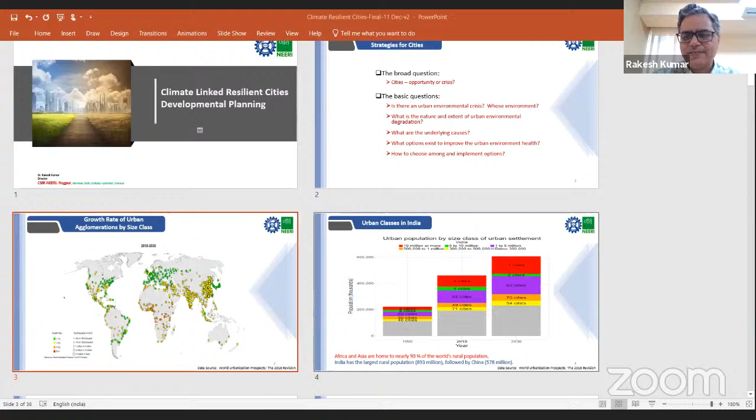This is a multi-view view. Yes, okay, yes, this is the topic: Climate-linked resilient cities developmental planning.

Thank you, Swamiji, and my good old friend, senior and friend both, Biswas ji, and all the colleagues and everyone else who has joined. Thank you very much for two things. One is the belief that I'll be able to give you a good lecture. And the second thing is for getting me into this conversation, which is very, very important for our country, which we should be discussing not only today but all the time. And that is what will take us far.

Many of you who do not know, NEERI is based out of Nagpur, that's where the head office is. But it's also there in Mumbai, Delhi, Kolkata, Hyderabad, and Chennai. Earlier we had 4 other regional centers, but that got assimilated over a period of time.

NEERI is an organization which got started in 1958 because of water and water-related issues. There was an outbreak of jaundice, and because of that, people felt we should have a research institution on water and sanitation. That is the reason why we are here. NEERI is also an institution where you have people from different disciplines, starting from all sciences to all engineering, on one single platform. We take pride in solving problems rather than only pointing out problems.

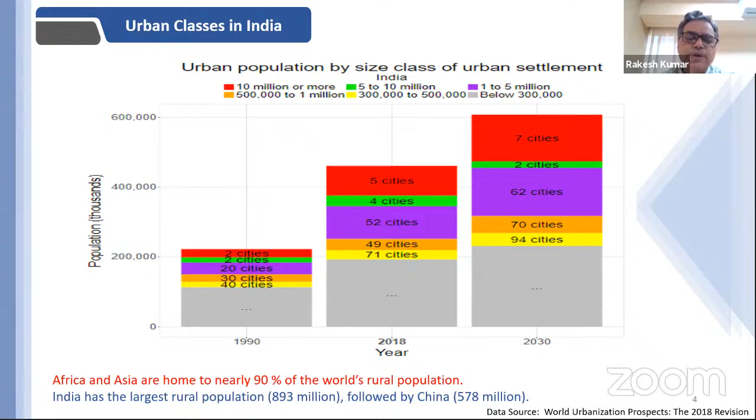So our rate of growth has been of high significance if you look at urban population and rural population together.

When we look at urban environment, we have variable pressure attributes. One, of course, is population, poverty, economic activity. Whenever we act, we have waste and emissions, air pollution, water pollution, resource use and degradation, and climate change-linked disasters - sudden flood situations, sudden drought situations, or cyclonic issues - all of that are basically pressure attributes. And of course, in recent times, NGOs, NPOs, and the judiciary are also putting a lot of pressure.

The other factors relate to how we succeed, and how we succeed in a particular way. We may fail if we don't do it the right way. So if our awareness is good, chances are we'll take action and improve. If our regulation and pricing policies are right, chances of success are high. Property rights and land use definition, if given, then success is high.

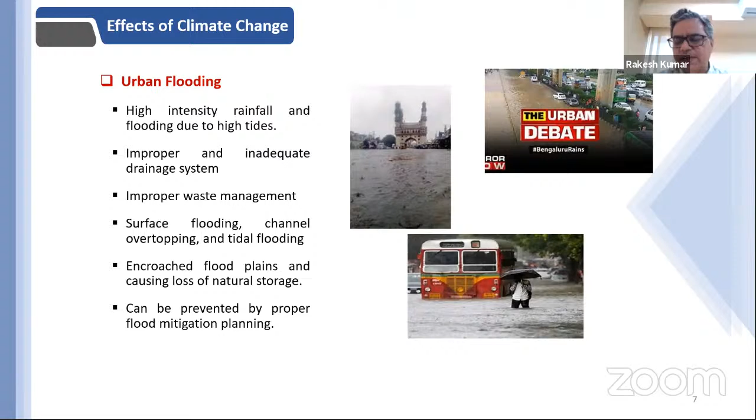So what happens when these situations arise? We have failure of infrastructure, like transport systems breaking down. Buildings can actually be in deep trouble if they're not built the right way. All utilities such as power and water supply get damaged. Hospitals, schools, and offices, which give support during crisis, are the ones that start having problems because of these issues.

And the last one, which is the most critical, is the supply chain mechanism. If I want to send medicine, food, or clothing, I can't actually do that because the crisis is serious and our supply chain is completely broken. Roadways and other infrastructure that are supposed to be supplying get broken.

Besides the impact on human beings, we also have ecosystem damages. This will completely change the way species live and interact. It will change the timing of biological events, and some of these things we will not notice in a short period of time. Later on, we'll realize that these timings are changing, which creates a lot of problems.

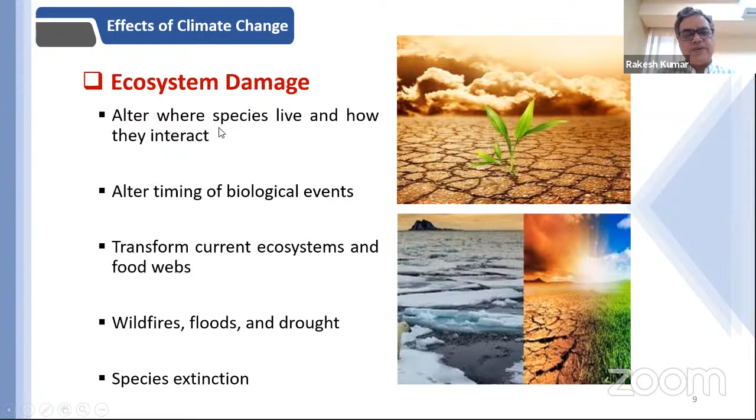Just to give an example, earlier the malaria window in certain Himalayan states used to be hardly about a month, but that has now expanded to about 2 to 2.5 to 3 months. So something is happening. It changes and transforms ecosystems and food webs. And when all of this happens, it will lead to wildfires, floods, and drought, and of course species extinction will take place.

In addition, when we look at the effect of climate change on air and water quality, which is directly linked with what we do, it will lead to human health impacts. It will lead to an increase in allergens in the air, which will start giving us health issues, and an increase in ozone. Whenever that kind of thing happens, we will have very intense downpours.

And depending on the situation in certain areas, we will have droughts. When water temperatures rise, you will have high evaporation and won't have enough water to drink. And obviously, when all of this happens, we will also have waterborne illnesses.

All of these things together will increase diseases, so the occurrence of infectious diseases will keep increasing. If I look at this health impact, all of these can happen: global warming, extreme weather phenomena, darker winters, slippery conditions, increasing precipitation, and hot weather will lead to all kinds of things, including water-related diseases.

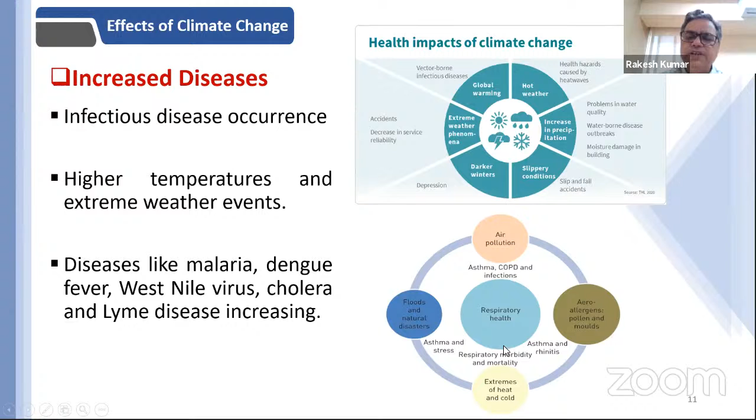We will have darker winters, meaning depression-related issues. We will have extreme weather phenomena leading to accidents, decrease in services, and vector-borne diseases. So we will have a large set of data coming out with all kinds of symptoms, and air pollution alone will lead to major respiratory symptoms and create issues for all of us.

In addition to that, microclimate changes take place. One is macro, when we talk about the whole of India, or even part of the region, like the coastal region of India, or say Rajasthan, the arid regions of India, or the Himalayan regions of India.

So cities are bigger in terms of sizes. But what also happens is in the small areas, we will have a significant increase or decrease in temperature, which will actually start affecting our comfort factor for staying in cities, which will be a problem.

One study which IIT Gandhinagar did found that 80% of urban areas show a typical urban heat island effect, where the temperature is 1 to 6 degrees warmer than the surrounding non-urban areas. Normally when we talk about climate change, we are talking about an average temperature rise of 1 to 1.5 degrees. But here, if our urban climate is not properly maintained or designed the right way, the temperature rise can be 1 to 6 degrees.

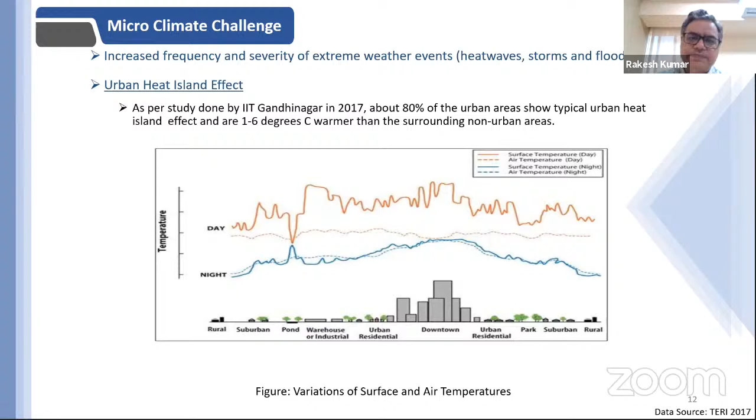Some of the other work that we have done shows these temperatures can go as high as even 10 degrees centigrade. So when we look at urban microclimate, when you have trees around, some heat gets absorbed and retained, some plant transpiration takes place, and when water falls, it goes below into the ground.

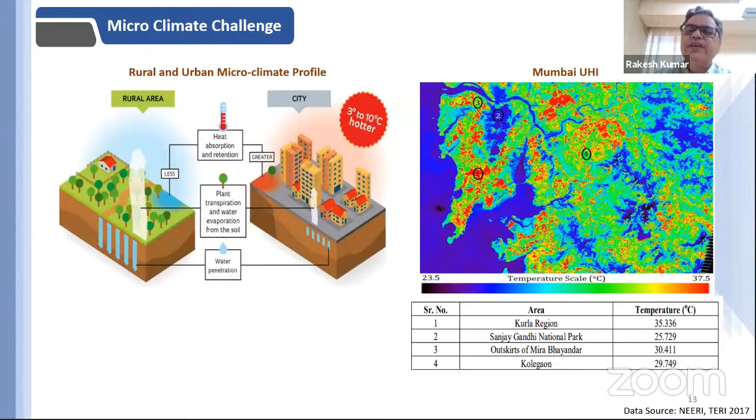We don't have to go too far, we don't have to cross countries, we can actually see it in this area. So when we do all of that, we will have high mortality. It could be due to heat, it could be flooding, it could be vector-borne diseases, or anything.

And these are the numbers now which have started coming in. The data is telling us that we would have very high deaths annually on this basis. As we go forward, there are some estimates being done for 2030 to 2050 which show it will lead to 250,000 additional deaths per year, and that's very significant.

These are of course computer models, but it is important to notice that all these models being talked about are now being validated for current times. So something which was predicted for 1970 is now happening in the years 2000, 2010, and 2020. Some of these data points are becoming more and more valid and apparent.

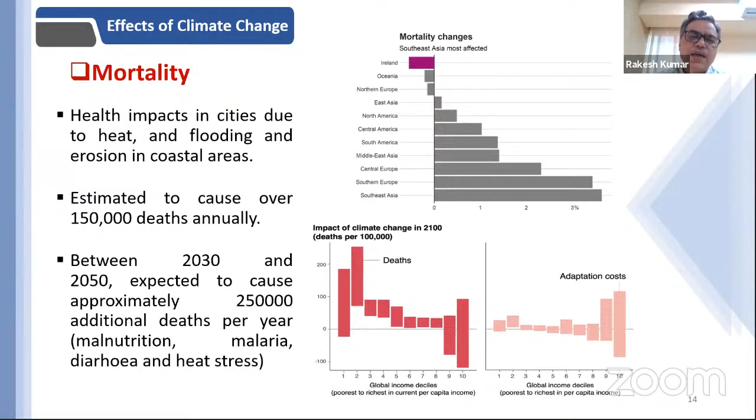So what is the limit when we want to do certain things on our own as an individual or as a community? When we look at these two concepts, assimilative and supportive capacity, assimilative capacity means that as human beings, when we create air pollution, water pollution, or solid waste and soil related issues, nature has its own tendency of assimilating it and making it proper.

Supportive capacity is the resources that we take from nature. When these two are matching, or in a balanced condition, things remain stable, but that balance starts changing because of climate change and related high pollutant discharges, which are exceeding the environmental limits.

So dilute and disperse can work in certain cases, yes, but if your assimilative capacity gets into serious trouble, you would have a situation where whatever we may do, our rivers would continue to be polluted, even if we are treating to tertiary level. If our BOD is in the range of 10, my river will be flowing with BOD of 10, which is not what we want. Our BOD limits should be less than 3, and that's not going to happen in the normal way.

So should we plan, and how do we do it? In a broader sense, if you take a territorial perspective, not just cities, because cities are a very small domain of things, but cities and the areas in and around them can be taken as territorial areas, and then this planned city or city area can be developed like a sustainable development paradigm, and plans made accordingly.

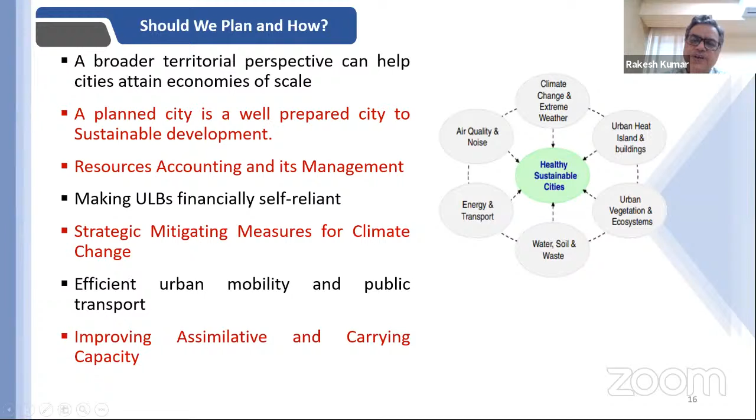I'll have to manage climate change and extreme weather, urban heat island, urban vegetation, water and soil, energy and transport. So all of these things together, when they start working in a positive way, chances are the city will survive. So what is it that we call a resilient city?

As I said in the beginning, resilient actually refers to the ability of any urban system to withstand and recover quickly from multiple shocks and stresses, and maintain continuity of services. That is one definition. There could be multiple definitions depending upon what we want to see out of this.

As we can see here, United Nations Habitat has made this framework where we start by identifying vulnerabilities, risk and impact, formulate adaptation options, assess and prioritize those options, implement measures, monitor and evaluate their effectiveness, and finally review them again, going on in circles.

So it's very important that when we talk about climate resilient services, for each parameter we must do a risk assessment, create awareness, do adaptation, look at resource efficiency, and then keep doing this adaptation planning and going back. Because if we don't monitor our progress, we are likely to fail, and that failure will be known only after 10 years, 15 years.

So in this case, we can't be doing that. We need to keep reviewing our goal post every year, and then readjusting our goals.

So key challenges, if I have to say, for urban areas: traffic jams and vehicular pollution, poor urban infrastructure, heat island effect, waste handling, housing which is very critical, healthcare facilities, air pollution, and heat waves in summer.

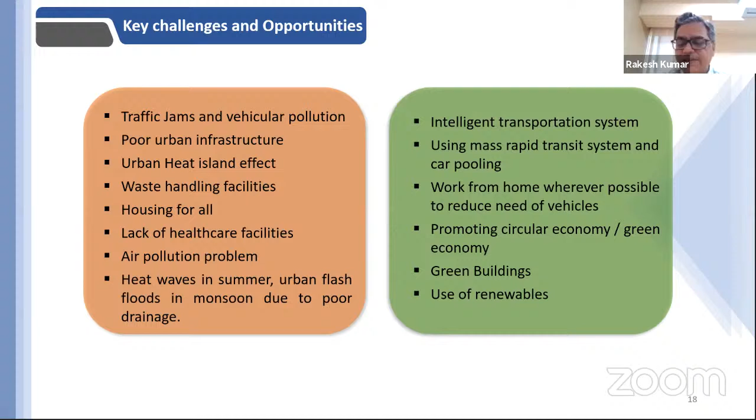It is very important to note here that India has the largest number of green buildings in the world as of now, and that's only because our environmental laws and policies have forced many builders and so-called good developers to work out details in which green buildings have been constructed.

And I'm glad there are some lectures after mine where we are talking about good tailored sewage conveyance and treatment systems, retrofitting existing sewerage infrastructure as per current requirement.

Most of our cities are in a decaying stage. The infrastructure of sewerage and sewer planning is in poor state, so they need to be refurbished.

And look at reduce, reuse, recycle, which we all know in terms of waste, and use IoT for smart controls, because unless we do that for a population like ours, we will not be able to do a good job.

So when we look at climate resilient strategy in some other countries, although the US has not signed the Paris Treaty, if you go around and find out, many cities in the United States have started talking about climate change and the idea of improving resilience of cities, and that's happening across many places. One city like Pittsburgh has already made this, they call it Pittsburgh Resilience Strategy, in which they put forward this idea called P4.

So people, planet, place, and performance. People meaning all those people who are going to live in the city. They need to be connected. They need to celebrate diversity. They need to be supportive to each other. And for that there is a structure.

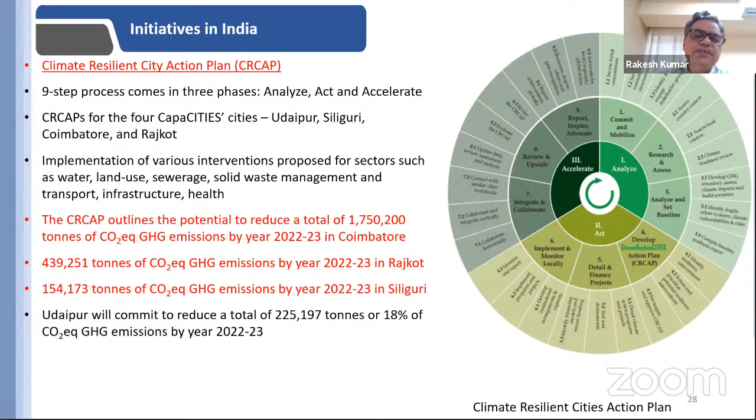Similarly, other work being done includes a program called Asian Cities Climate Change Resilience Network. It is working in four other cities: Surat, Pune, Cochin, and Ludhiana. In each of these, resource-related issues are being discussed, along with economic robustness, economic development, climate change adaptation, and the role of local and diverse processes linked finally to health.

But what is actually happening is that many of you in the climate modeling domain will find that when we do this calculation, there's very wide variation in the results of climate models. So what is important is that we need to bring these climate models and scale them down to a level that everyone can use for their own areas and regions, making it much easier for people to understand and take necessary action.

So what are the ways cities can build more climate resilient neighborhoods? I'm just giving some examples. One is to tailor early warning systems to meet the needs of vulnerable people. For instance, you can announce if a cyclone is coming, or flooding is likely, or infrastructure-related damage can happen—in that case, early warning systems will be helpful.

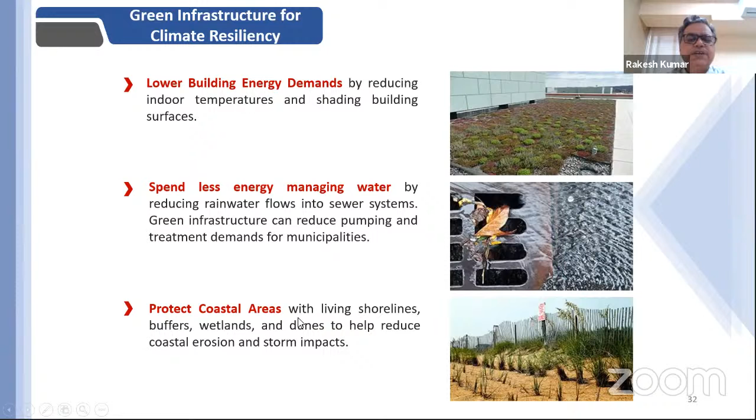So when I talk about climate resilience, there are a few things: manage flooding, prepare for drought, reduce urban heat island—for which there are various means. Lower building energy demands by making green buildings or traditional buildings so energy demand is lower. Spend less energy managing water by capturing rainwater or recycling wastewater so demand on water is less. And of course, protect coastal areas with buffers, wetlands, and dunes.

There are some modeling tools and techniques used, so I will not go into detail, but what's important is that while planning resilient infrastructure for cities, there are good models now available, and new models can also be developed—starting from ENVI-met, RayMan Pro, Minfoam, CFD, WRF Chem or WRF itself, remote sensing, etc. We have to start using some of these modern tools and techniques.

We also need to start doing future planning and design of infrastructure, looking at what changes will take place in the next 25, 30 years. As I said a couple of slides back, all global climate models need to be downscaled to know what is going to happen in the local area. Otherwise, globally, the data is not sufficient to take decisions. Socioeconomic scenarios and their representation, as I said earlier, are also very important.

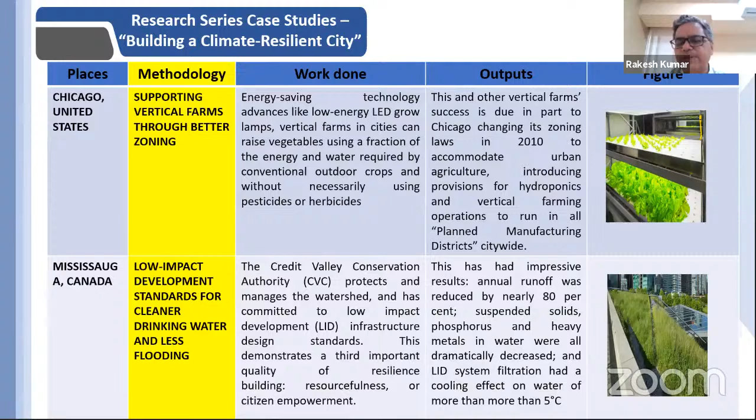So these are some examples. For example, in Chicago, United States, they are supporting vertical farms through better zoning. These are details, but urban farming can possibly become reality. In Mississauga, Canada, they are implementing low impact development standards for cleaner drinking water and less flooding—creating infrastructure so that when rains happen, water gets soaked and kept in a single place and goes down. Gibsons, Canada is taking advantage of the lower cost and higher resilience of natural systems, preserving the natural system so it can last forever.

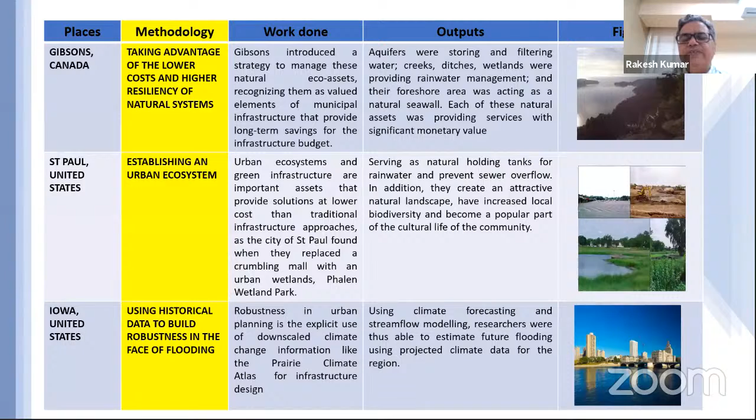St. Paul is another city, in Minnesota—it's called a Twin City. They are establishing a new urban ecosystem where urban areas are being converted largely into natural ecosystems so that biodiversity is also maintained. Iowa is another city working on historical data to build robustness against flooding. All of these are being done by way of retrofitting existing cities.

So the key conclusion from my talk is that there is an urgent need for climate resilience in the built environment planning and development of society.

Various approaches have been used, but we should not only be talking about circular economy, but approaches like carrying capacity, green infrastructure development, smart city development, which India has been doing to a greater extent, but it can do more. There's an urgent need to develop an early warning system, as I said, that's the most important aspect, so that people know what is going to happen and how, and can take necessary action.

Model tools and techniques, as I said, CFD and WRF can be used to mitigate impacts. And knowledge is what actually can tell us a lot of things from ancient architecture as well. Our people in different parts of the country had different kinds of architecture because they understood what was going on. But what we see now is all structures are being built in a similar way, so we need to relook at this whole system of structures that we are making. And lastly, nature-based and nature-derived tools and techniques should be used, which will actually do the mitigation much better otherwise.

So thank you very much, and thank you for having me for this lecture. Thank you.

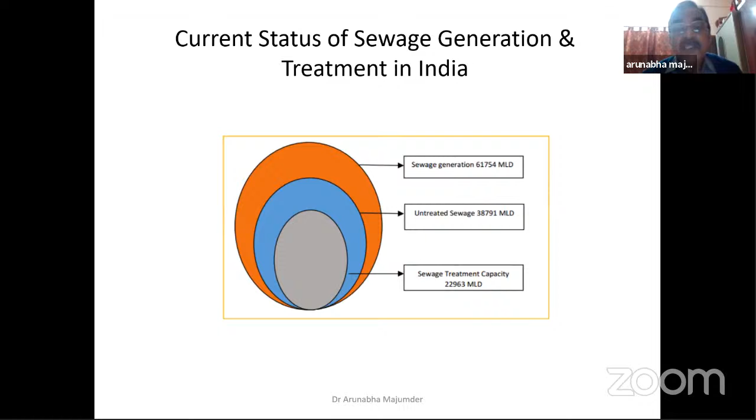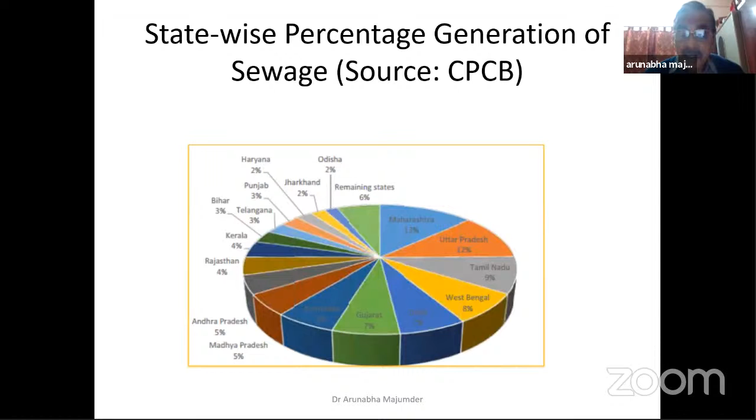If we look into the state-wise percentage generation of sewage according to the Central Pollution Control Board, you will find the generation of sewage varies, maybe from 12-13% to even 1%, depending upon the size of the states. But if we project this generation state-wise, you will find that 49% of the country's sewage is generated from the top 5 states, like Maharashtra.

Maharashtra generates 8,143 million liters per day, that is 13% of the sewage. Uttar Pradesh generates 7,124 million liters per day, that is 12%. Tamil Nadu generates 5,599 million liters per day, that is 9%. West Bengal generates 4,667 million liters per day, that is 8%. And Gujarat generates 4,119 million liters per day. So these 5 states together produce 49% of the country's sewage.

Installed capacity sewage treatment plants in the top 5 states account for 66% of the country's treatment capacity. Maharashtra treats 22.16%, that is 5,160 MLD of sewage. Gujarat treats 13.16%, roughly 13% of total India's sewage. Delhi treats 11.58%, that is 2,694 million liters per day. Uttar Pradesh treats 11.37%, that is 2,646 million liter per day. Tamil Nadu treats 1,800 million liter, that is 7.63%.

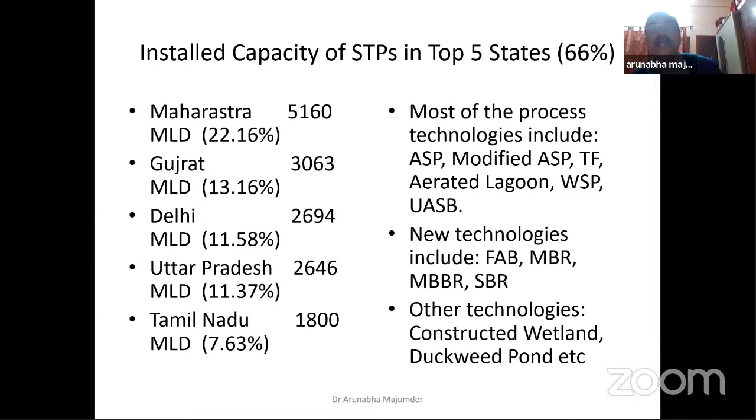Now, in the wastewater treatment system you will find centralized treatment system and decentralized treatment system. In the past, mostly we adhered to the centralized treatment system. Our experience with respect to centralized treatment system is that it is costly because pipeline costs more, pumping costs more, operation and maintenance costs more, and also there are various problems in running these waste treatment plants.

Many centralized waste treatment plants are not running. In this connection, I like to mention the sewage treatment plants that were installed during Ganga Action Plan Phase 1, remaining idle today. These are mostly in a defunct stage, not functioning, and today the Government of India under the Namami Gange program is giving fund again for renovation and reconstruction of the sewage treatment plants. I can even give the example of Howrah sewage treatment plant. This is not functioning today, and it needs to be dismantled, and a new sewage treatment plant will be built shortly. Like that, Srirampur sewage treatment plant, many sewage treatment plants became non-functional. Even Noapara sewage treatment plant, that is Baranagar, and Kamarhati sewage treatment plant, are also not functioning.

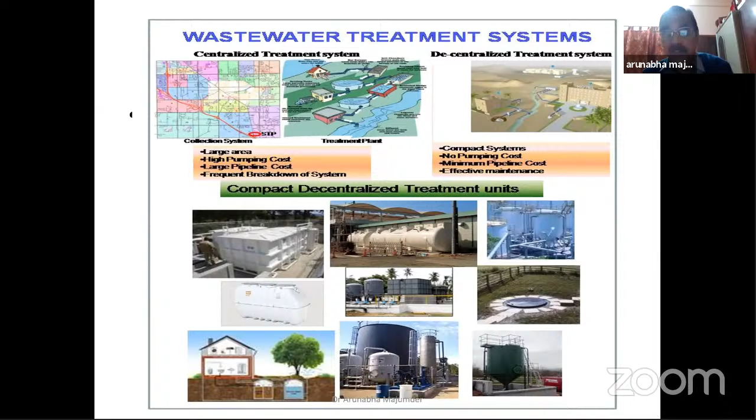We do consider, and you have options with respect to different treatment systems for the same city. This is the sewage treatment plant where you will find that we have a pre-treatment system, primary treatment, then secondary, and then tertiary. Normally we do the pre-treatment, primary treatment, and secondary treatment.

According to the old standard, our BOD limit should not be more than 30 milligram per liter. It was the standard as per the Ministry of Environment and Forest, Government of India. CPCB was also following this. We, the local urban bodies, were also adhering to that standard: 30 milligram per liter BOD, 250 milligram per liter COD, 100 milligram per liter suspended solids, like that.

Now the situation has changed, because of very many reasons of Ganga pollution, Jamuna river pollution, etc. We found that for Jamuna river pollution control, the limit of treated sewage came down to 20 milligram per liter BOD. Now, recently, in 2019, the Honorable National Green Tribunal has modified the standard.

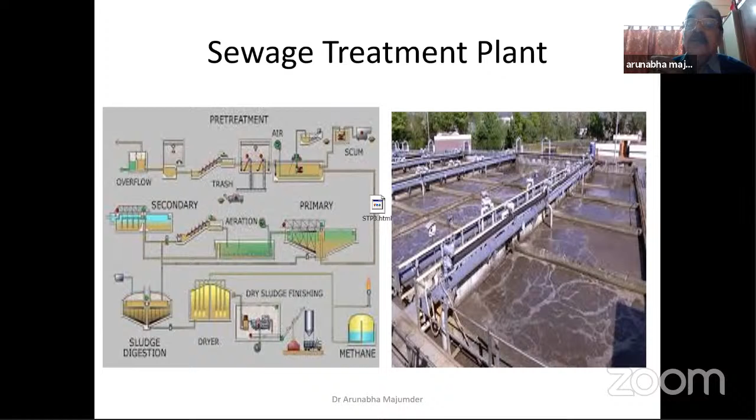Mostly we find this not only in urban sewage treatment plants like city or municipal sewage treatment plants, but also similarly in industrial wastewater treatment systems. Also, the operators who are operating these plants are not properly trained. This is also an important issue that we find while visiting sewage treatment plants and effluent treatment plants.

The water may flow downflow, upflow, both down and up flow, or horizontal flow. So when it is flowing through this media horizontally, or in an up-down vertical system, or only downward, the treatment is taking place. There is an attached growth system in the media, which becomes an aerobic system — an advantage. We can also grow plants over it, which supplies oxygen to the system.

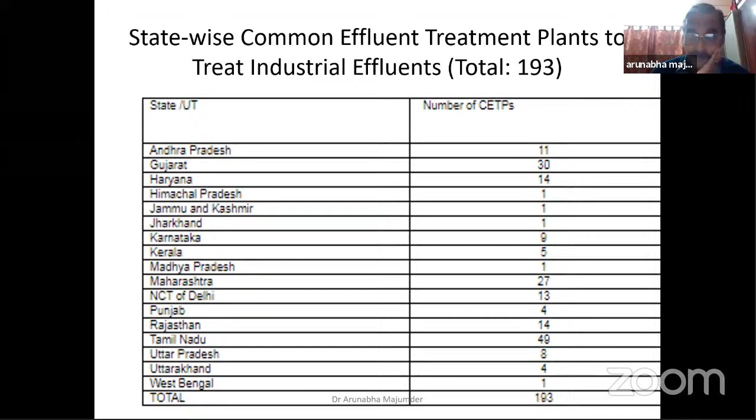Today, according to information available to me, 193 common effluent treatment plants are working, give or take two, three, or four more. The maximum number of common effluent treatment plants are working in Tamil Nadu, 49, Maharashtra, 27, and Gujarat, 30. Whereas in West Bengal, we have only one common effluent treatment plant, at Koraidanga, for treatment of tannery effluent. Now we come back to the sewage treatment plant.

The number of sewage treatment plants, according to information available to me, is 920 in India. So 920 municipal sewage treatment plants are working in India, and accordingly you will find different states have different numbers. In West Bengal, we have 28 functional sewage treatment plants.

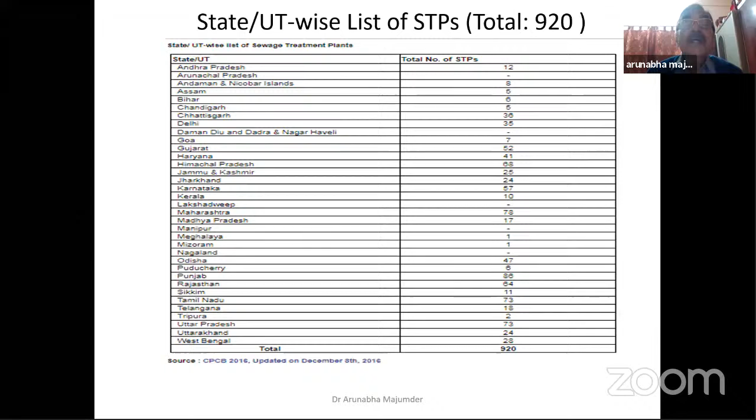Now, if we look into the mega cities, metro cities, class 1 cities, and class 2 cities, we are generating 40,000 million liters of sewage. Earlier, in the first slide, I showed the total wastewater, covering class 1, class 2, class 3, mega city, metro city, like that. Actually, we have more than 7,000 cities in India.

Of the 40,000 million liters of sewage generated in mega, metro, class 1 and class 2 cities, only 30% of the wastewater is getting treated as per facility available. But the treated effluent from 39% of sewage treatment plants is not conforming to the standard. This is important to be noted: 39% of sewage treatment plants are not functioning properly, and their effluents are not conforming to the standard.

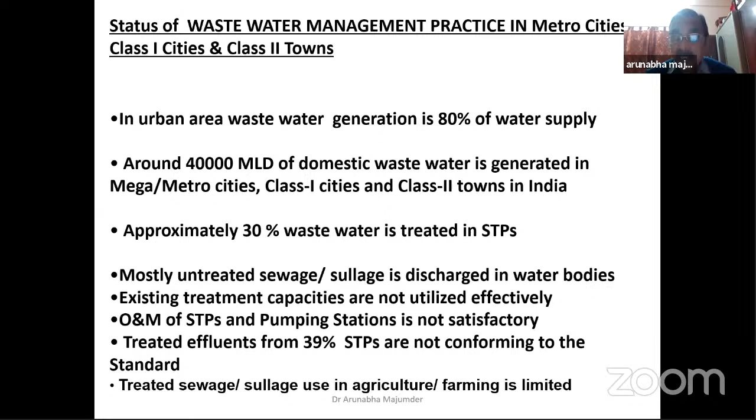Operation and maintenance of sewage treatment plants and pumping stations are unsatisfactory. Existing treatment capacities are not utilized effectively in many treatment systems, and these are mostly discharged into water bodies. Some wastewater is getting discharged to agricultural or farming land.

So the mode of disposal of urban wastewater includes direct disposal into the river. In some cities and towns, disposal is directly into the river as well as into agricultural land. There is also indirect disposal into rivers, lakes and ponds, and direct disposal into agricultural lands. In coastal cities and towns, wastewater finds its way to estuaries, creeks and bays.

In summary, I can say that the major quantum of treated wastewater is getting discharged into water bodies, rivers and canals. Only a certain portion of this wastewater is utilized for agricultural purposes, and that is still limited today. So we have ample opportunity for recycling and reusing wastewater.

Regarding disposal of urban wastewater, a study conducted by 7 IITs led by Professor Vinod Tare under the National River Conservation Directorate made recommendations. They recommended that treated sewage should not be discharged into the river. Strictly, they mentioned that not a single drop of sewage after treatment should be discharged into the river. Instead, they recommended the use of treated sewage for different purposes, such as agriculture and industry. So therefore, we have to look into this particular issue of recycling and reuse of wastewater.

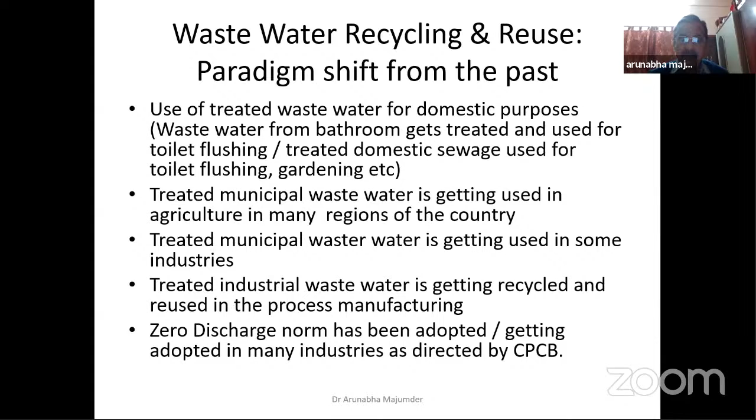Relevant issues to be addressed for wastewater recycling and reuse: selecting appropriate technology for developing tailor-made wastewater treatment processes to meet the quality standard for recycling and reuse of wastewater. This is very important - what technology you will adopt. So selection of technology is an important issue we consider.

To assess the scope as well as extent and magnitude of the demand for recycling and reuse of wastewater. This is very important - that means assessment of the demand of water.

Operation and maintenance aspect of the total process mechanism is important because there could be risk. When we talk about recycling and reuse of wastewater, say sewage after treatment is utilized for agriculture, there could be occupational health hazard for the farmers and consumer health hazard. If I am consuming vegetable salad without cleaning or washing with hot water, it may cause problems - it may cause helminthic infestation in the body. So therefore various risk aspects also need to be looked into.

Cost benefit analysis and social as well as user acceptability in the system is also very important. User acceptability - and accordingly we have to motivate the people. When talking about utilization of wastewater in agriculture, the farmers need to be motivated and made aware.

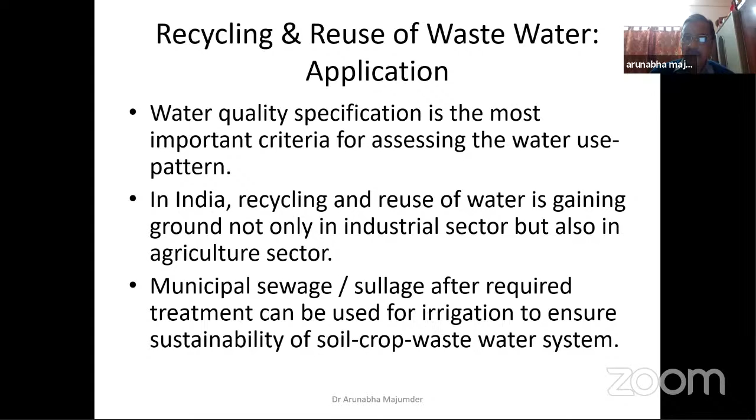In India, recycling and reuse of water is gaining ground not only in industrial sector but also in agricultural sector. Municipal sewage after required treatment can be used for irrigation to ensure sustainability of the soil-crop-wastewater system. In developed countries where environmental standards are applied very strictly, like USA or European countries, much of the wastewater is treated prior to use for irrigation of fodder, fiber, and seed crops, and to a limited extent for irrigation of orchards, vineyards, and other crops. So the extent of treatment necessary depends upon its use.

In India, use of urban wastewater for irrigation is in practice in some specific areas. It includes application of untreated or partially treated wastewater in crops and vegetable production. If I talk about East Kolkata, we are utilizing untreated wastewater - in East Kolkata wetland, vegetables are grown with untreated wastewater, yes. So there are instances in India where untreated or partially treated wastewater gets utilized.

In India, treated sewage is being used today for a variety of applications. What purpose are we now using treated wastewater for in India? For farm forestry, horticulture, industrial use such as cooling towers, agriculture, fish culture, toilet flushing, etc.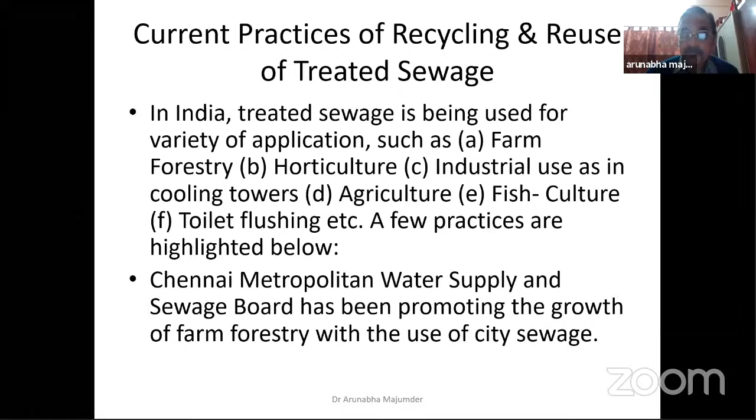I'm giving some examples from our country of utilization of wastewater. Chennai Municipal Metropolitan Water Supply and Sewerage Board has been promoting the growth of farm forestry with the use of city sewage. This is the utilization of wastewater - sprinkler methods being adhered to here. They are following that with the wastewater, utilized in the lawn, golf course, etc.

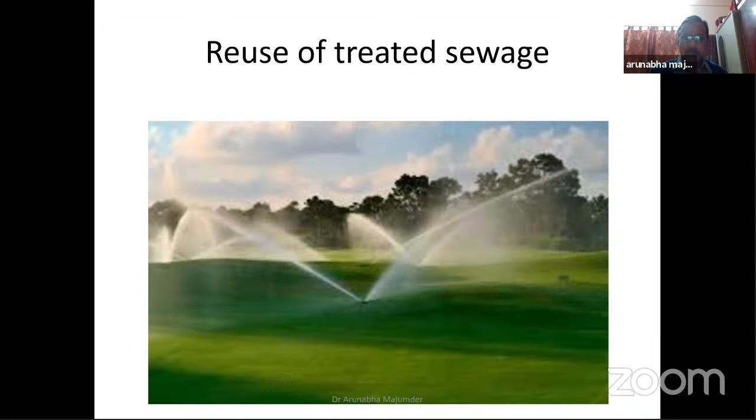Indian Agriculture Research Institute, Karnal, carried out extensive research study on sewage farming and recommended irrigation methods for sewage-fed tree plantation - their recommendation is tree plantation, not vegetable growing. The advantage of tree plantation is that people are not eating anything out of that tree, but it gives money to the people from the plant. So sewage-fed tree plantation is a very good method for wastewater treatment, and it also gives revenue to the people.

Chandigarh is using treated sewage for horticulture, gardening, and maintaining greeneries. Delhi has put in place planned reuse of treated sewage for designated institutional centers. Government of Karnataka has issued an official directive to take all necessary steps to ensure that only tertiary treated sewage may be used for non-potable purposes - non-potable purposes like all gardening, including parks, resorts, and golf courses. So this is also very good.

I remember we did a study under the India-European Union research project. In Nagpur, NEERI was the principal institute for this project, where we utilized wastewater in a park - Dayanand Park - where the wastewater gets treated in the park itself and is utilized for gardening. So this is the advantage.

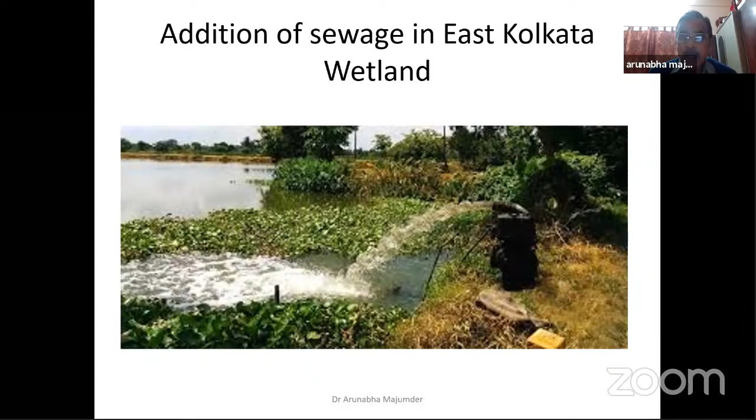Now, treated effluent municipal wastewater disposal on land for irrigation - the discharge norm from the Central Pollution Control Board: treated industrial effluent and municipal wastewater should meet the norm prescribed for irrigation under the Environment Protection Rule 1986 or consent, where for industrial wastewater, pH should be 5.5 to 9.

TSS 200 milligrams per liter, oil and grease 10 milligrams per liter, BOD 100 milligrams per liter, arsenic 0.2 milligrams per liter, cyanide 0.2 milligrams per liter. This is the norm for utilization of wastewater for irrigation under EP Rule 1986. TDS should not be more than 2,100 milligrams per liter - this is an important parameter. Dissolved solids should not be more than 2,100 milligrams per liter, and SAR shall preferably be less than 18, but must not be more than 26.

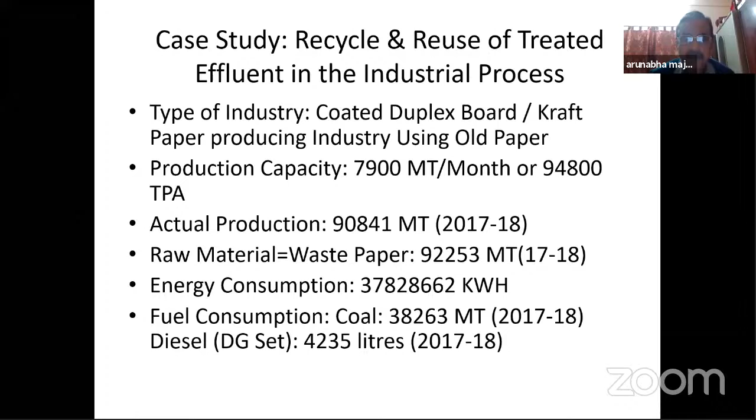Coming to the effluent treatment plant, the basic principle of treatment is physical, chemical, and biological. Inflow to the effluent treatment plant is 2,845 cubic meters per day - this is the wastewater getting treated. The effluent treatment plant comprises an equalization tank, primary clarifier, aeration tank, secondary clarifier, facultative aerated lagoon, sedimentation tank, pressure sand filter, and activated carbon filter.

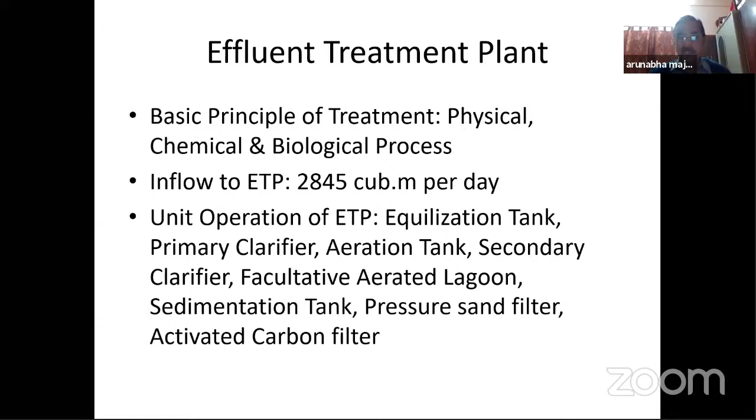Apart from that, the industry has a dissolved air flotation unit called Krofta. Paper industries normally have Krofta, which is an upflow dissolved air flotation system. This is similar to a Sedicell type unit, where they recover fibers and utilize them in the process. So recovery is taking place in the dissolved air flotation system as well.

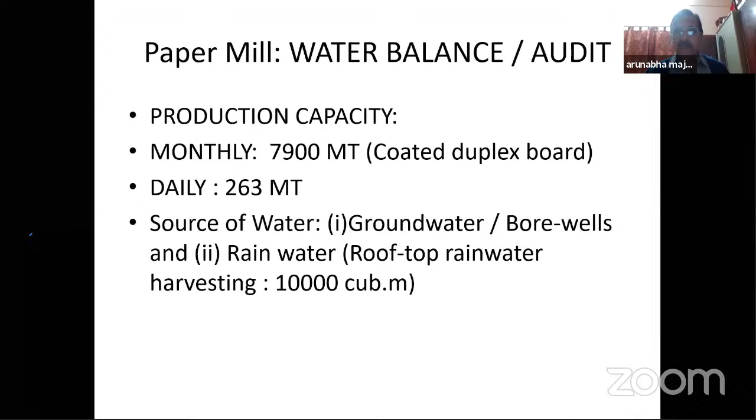Production capacity is monthly 7,900 metric tons, daily 263 metric tons. Source of water is groundwater, borewell water, also rainwater roof catchment harvesting of 10,000 cubic meters. The main source of water is basically borewell water.

Process requirement, excluding boiler feed water and domestic water, is 15 cubic meters per ton - that is, for 1 metric ton of paper production, 15 cubic meters of water is needed. So total water requirement is 3,996 cubic meters per day. Boiler feed water requires 250 cubic meters per day, and domestic requirement for factory workers is 24 cubic meters per day. Total water requirement is 4,270 cubic meters per day.

So 4,270 cubic meters of water is required every day by the industry for production of 263 metric tons of duplex board.

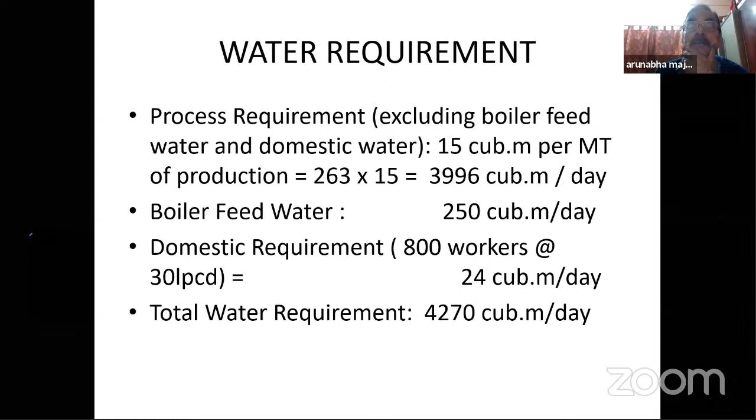But what is actually taken as fresh water from the borewell is only 840 cubic meters, against their maximum permission of 950 from the West Bengal Pollution Control Board as per consent. So only 840 cubic meters of fresh water is taken from the groundwater source. There are 4 borewells with permission from the SWID.

Recirculation from the ETP is 2,480 cubic meters per day. Recirculation from the Krofta unit, that is DAF, is 950 cubic meters per day. So total recirculation, reclaimed water after treatment, is 2,480 plus 950, that is 3,430 cubic meters per day of wastewater recycled and reused every day. Total water used in the process is therefore 3,430 plus 840 fresh water, equaling 4,270.

So you can understand that out of the 4,270 cubic meters required, 3,430 cubic meters per day is recycled in the system - in-plant recirculation of clarified water from Krofta, 950 cubic meters, and recirculation from ETP of primary treated effluent.

After the primary clarifier, the wastewater is treated through a dual media filter, 2,000 cubic meter per day. Recirculation from the secondary clarifier from the ETP is 480 cubic meter per day. So total recirculation is 3,430 cubic meter per day, which is 80% of the total requirement.

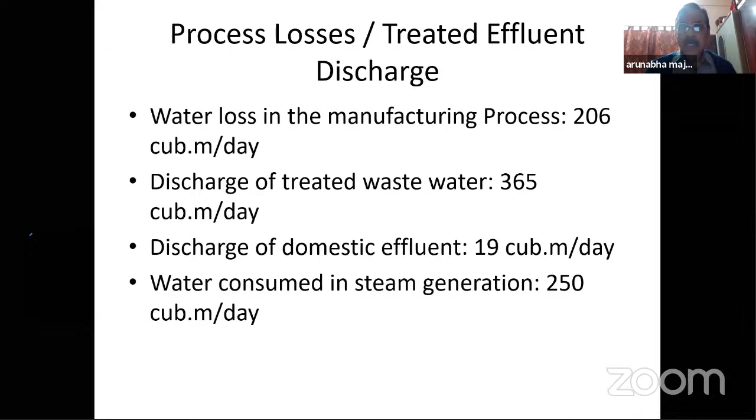Way forward: reclaimed or recycled water is the process of converting wastewater into water that can be reused for various purposes. Reuse may include irrigation of gardens and agricultural fields to minimize freshwater use. Recycled water may also be used in residential houses, institutions, and industry.

Energy efficient natural treatment can upgrade wastewater quality so as to conform to the norms for agriculture use, gardening, and horticulture. In conclusion, I must say that the sewage treatment plant must work like a factory. Yes, this is very important.

A sewage treatment plant will be working like a factory, where the sewage is the raw material available free of cost. And we can generate from that energy, manure, poultry feed, fish, and irrigation water. So we can recover the resources.

Assets of sewerage and sewage treatment systems must be sustainable. Proper O&M is the key issue to achieve that. Revenue earning should be the target from resource recovery, so we have to earn revenue out of that. Otherwise, operation and maintenance cost will not be available as per requirement.

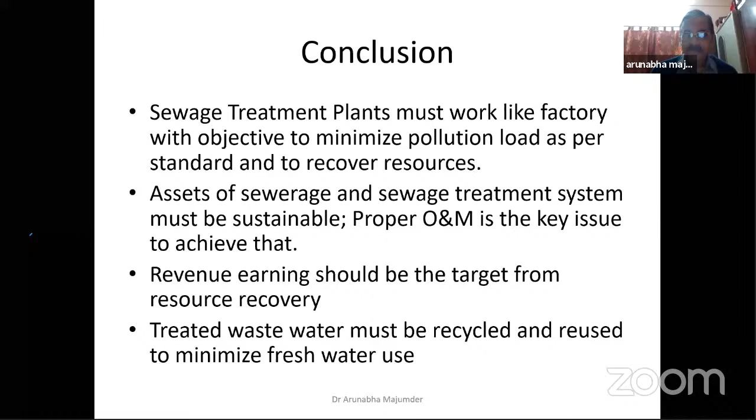Treated wastewater must be recycled and reused to minimize freshwater use. Decentralized wastewater management system is a good practice, and urban local bodies should consider such a decentralized approach for city sanitation. The pollution load on rivers and other water bodies could be reduced effectively if a decentralized approach is undertaken for management of wastewater along with recycling and reuse.

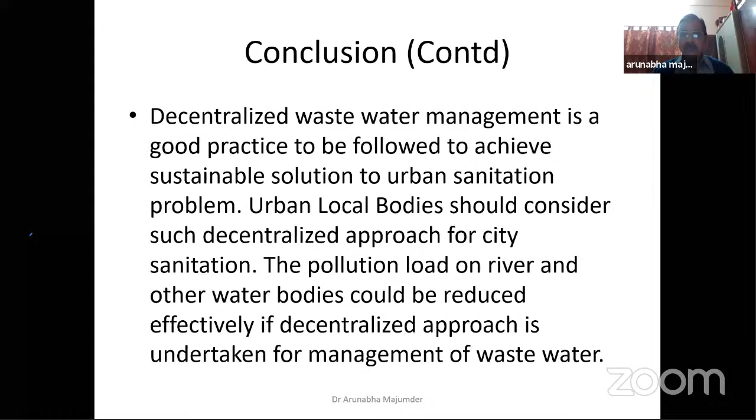This is a very... am I audible? I hope. Yes, please. I request the participants for the deliberation. If you have any question, you can ask me, for I think time is short. Almost I have taken 1 hour. Okay. Professor, if you have any question, Banerjee, you can raise it. Yes, please. Anybody having any question?

There are some questions in the chat box, Professor Majumder. One question is why the flows in rivers are getting reduced. Another question is about where the treated sewage water gets drained into. There is also a question from Gaurav. Gaurav, please ask the question directly to the professor. So these are the questions.

PowerPoint, can you see it now? Or are you seeing the slide sorter still? Still we are seeing the slide sorter. Okay, let me see, let me close that then. You close and then again, and then I did play from start. Yes, let me see, okay, let me start the screen share again. I am screen sharing, but let me stop share and start again.

Now what? PowerPoint. Let's see the view. Slideshow, now can you see the slides? Are you seeing the main slide here? Please share the screen, can you hear me? Yeah, I'm sharing the screen, can you see it? No. Oh God, okay, let me do it with you, Sanjay. Hold on, I have somebody on the phone who can help me here.

So tell me. Go to share screen, okay, and then click on just the PowerPoint file. Do you have it open? I don't see it here. No, okay, go back to PowerPoint. Let's make sure you have the file open. It's not doing anything. Let me go back to PowerPoint, it must be behind here, wait a sec. It's just in Zoom. Sanjay, can you mail me the file? Then we can project it. Yes, I can mail it, but I don't understand why I can't share. Oh, it's coming, it's coming, it's coming. Is it coming? Ah, this is again the sorter view. Okay, let me just change to slideshow - can you see it now? Yes.

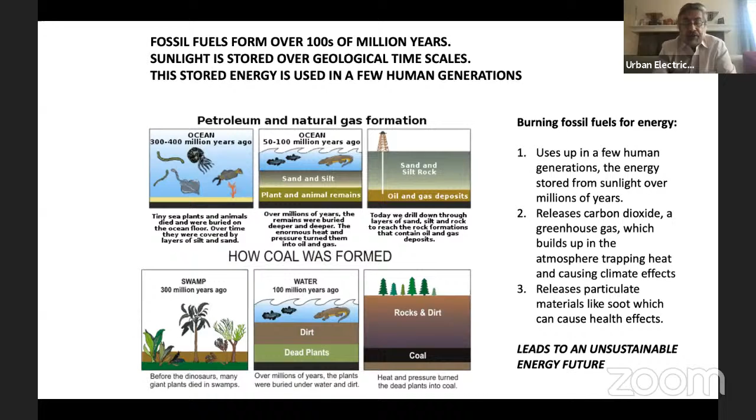Furthermore, it tends to release particulate matter, which can also have adverse effects, for example on your health if you breathe it. As you know, in a city in India, for example, where they're burning a lot of diesel or something, you get particulates in the air which have respiratory effects. So there are multiple effects of this rapid use of fossil fuels. Things which have been stored over geological timescales, we're using over human timescales, so this, in a broad sense, is not a sustainable future for us to go towards. This is illustrated in the next slide, where I show that we are using up the fossil fuels on the right by burning them in one form or another.

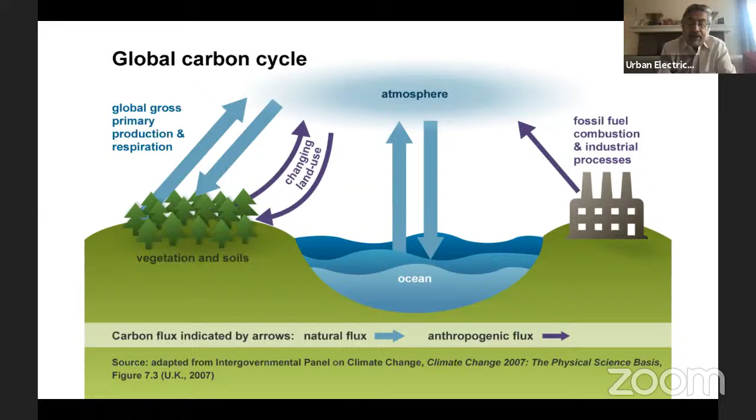And that has several effects. Not only is the concentration of these types of greenhouse gases increasing, but also the particulate concentration in the atmosphere is increasing. So the excess carbon dioxide, or excess greenhouse gases, we are putting in builds up rapidly in the atmosphere, coming from many different sources.

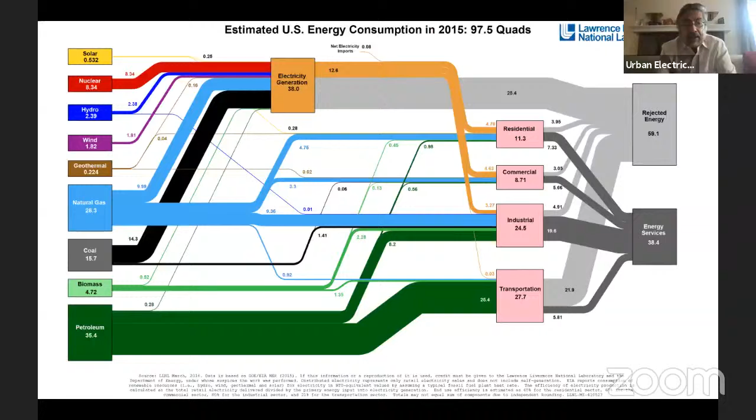So this is for the US. I'll show you the global picture later. The main problem is that we are using mainly our fossil resources to supply our energy needs. The next slide shows this in more detail. You can see the vast majority of our use is fossil resources, whereas a very small amount is renewables or nuclear.

So in order to get to a sustainable future, we have to move our electricity generation primarily, and transportation to the extent possible, to be based on renewable resources. This is the sort of energy future we are trying to move towards.

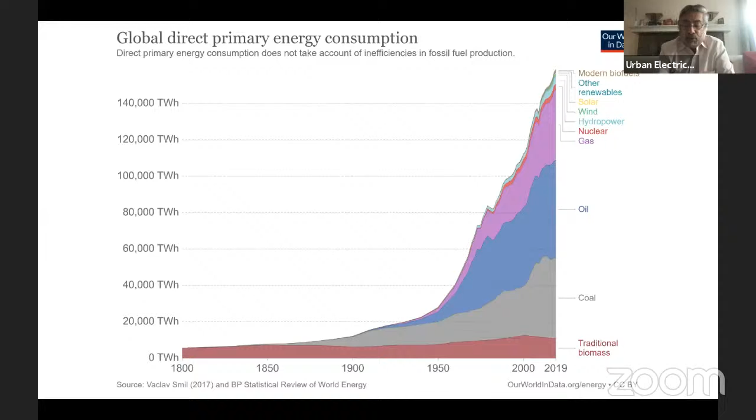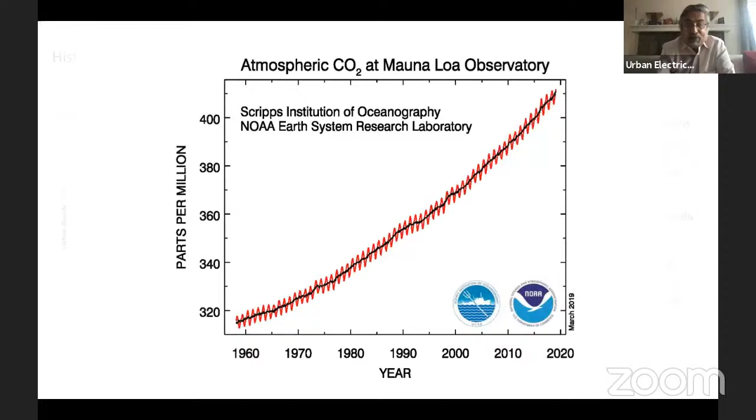So how does this work? Within even something like 60 years, we have gone from 320 ppm of carbon dioxide to over 400 ppm, matching the last part of that slide I showed you before. This last bump has been very rapid, going up due to the inability of the biosphere to uptake the carbon dioxide that we produce.

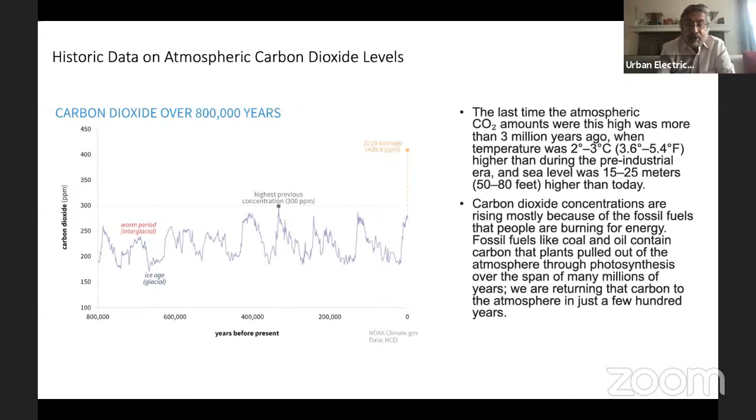When it heats up the biosphere, energy gets reflected back as infrared, which tends to absorb into certain gases. Water vapor is one of them, CO2 is another, and even methane absorbs this infrared very strongly. So just like any greenhouse, the atmosphere warms up due to increased CO2 concentration, giving increased temperatures due to infrared absorption. Because this warms up, it evaporates more water, perhaps from the oceans, warming them up further. It's a vicious cycle—it feeds back and gives you increased warming. This is the global warming everybody talks about associated with CO2 increases.

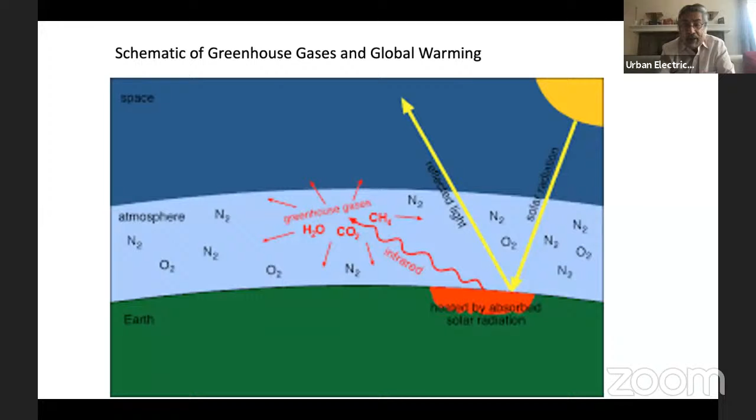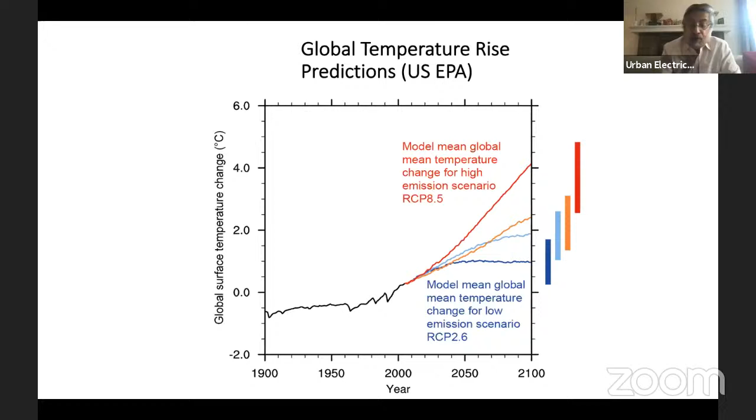Even with that, we're talking of at least a 1 degree rise in temperature in a very sustainable sort of renewables-based energy future. So moving on, what is the effect of these?

So one of the first effects that we've seen is that due to the global warming, the ocean surfaces are getting warmer, and this is leading to severe weather events that are occurring on the coasts.

And you can see that coupled to these severe weather events, there is increased height in the sea level and in the tides. This makes many coastal

establishments, industrial and power, particularly vulnerable.

And the first signs we are seeing of the effect of global warming are in the coastal regions, where you're seeing many vulnerabilities in the utility industry and so on.

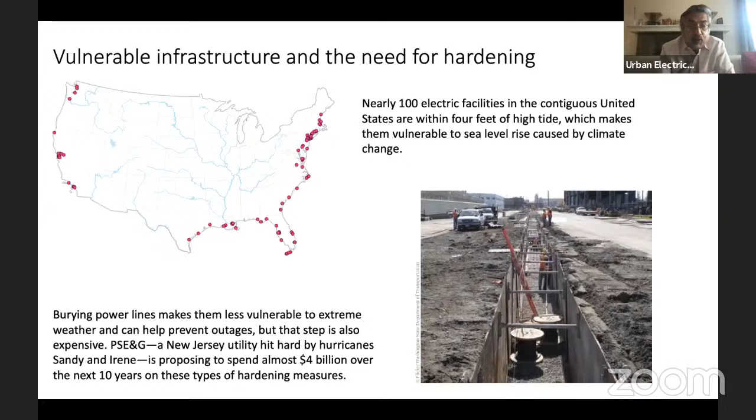And I can show you this more. This is for the US. It's potentially true for the whole world.

There's an increase. Similarly, the incidence of fires without mitigation, and you know that we are getting much more in the ways of fires now due to the fact that the weather is changing.

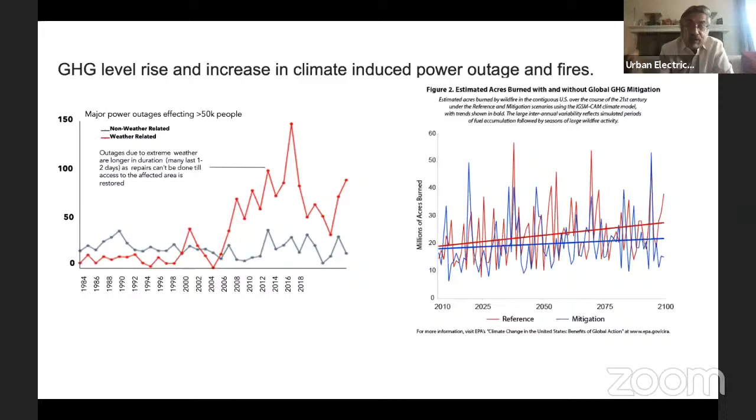There's more arid zones forming, and you can see the increase in the fires that would occur over a period of time, and the millions of acres that would be burnt if there was no mitigation, if we went with the red scenario that I showed you in the previous slide.

You'll say, well, it's only 8-9 centimeters, about a third of a foot. But in global terms, this is a huge amount of sea level rise.

And due to that, you get a significant effect on coastal regions that are occurring. And part of this comes from thermal expansion. I've shown you that. And part of it is coming from meltwater.

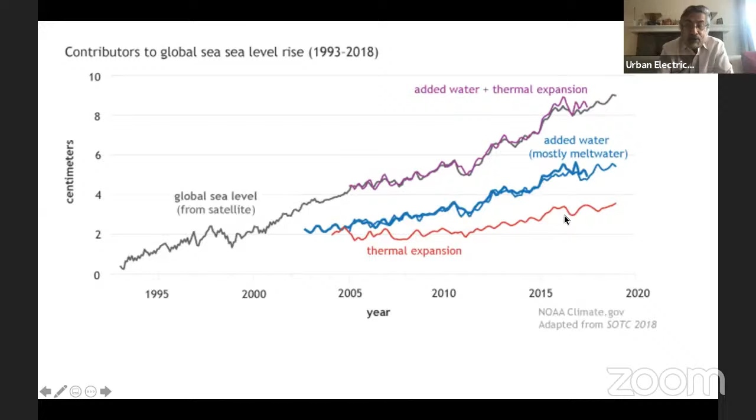So the top picture, the top line is the total sea level rise, and the components are the meltwater and the thermal expansion.

So there is not only a sustainability issue related to not using up resources for future generations by using up fossil fuels, but also to get our use in balance so that these adverse effects of climate change and sea level rise are mitigated. So there is a broader economic aspect to sustainability and the quality of life, the coastal regions, the arid zone formation, and so on.

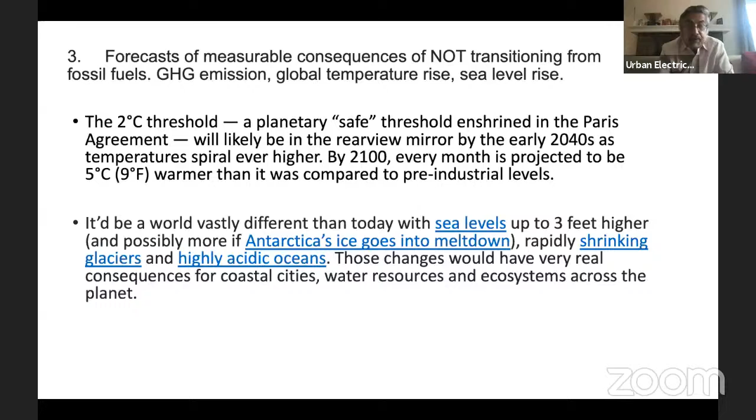Plus, there is one other thing that I have not mentioned yet, which is the effect on our health. The health effect can come also from burning fossil fuels, because they tend to put various pollutants into the atmosphere. And I will deal with that right at the end.

So these may perhaps be considered renewable resources, and they are energy that we generate over a human time scale, but we have no control, really, or very little control, of when that will happen. The sun shines when it wants to, which is during the day. The wind blows. And so these are intermittent resources.

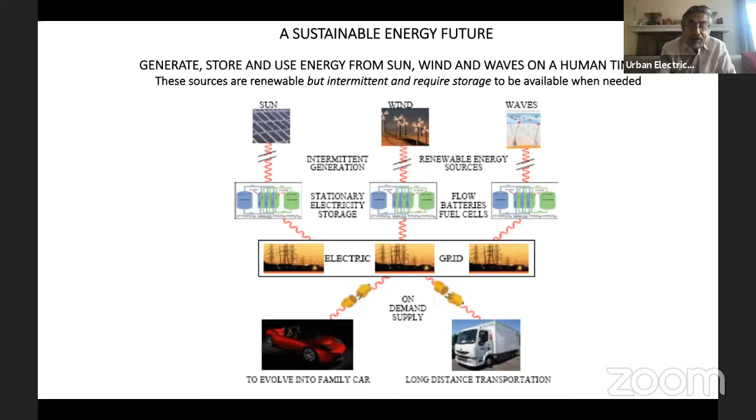So ultimately, a sustainable energy future would move towards electricity usage for automobiles, whether it comes from fuel cells or from batteries, and electricity usage for other purposes, which comes also from renewables. So the whole economy in the future, in the next 100 years or so, 80 years, would transition away from fossil fuels, or at least mitigate the use of fossil fuels, to go towards a more sustainable future.

So, for example, this is an example of windmills to generate wind power, solar panels which can capture sunlight to make electricity. And then these structures you can see are batteries, which can store the sunlight and the wind for periods when they are not available.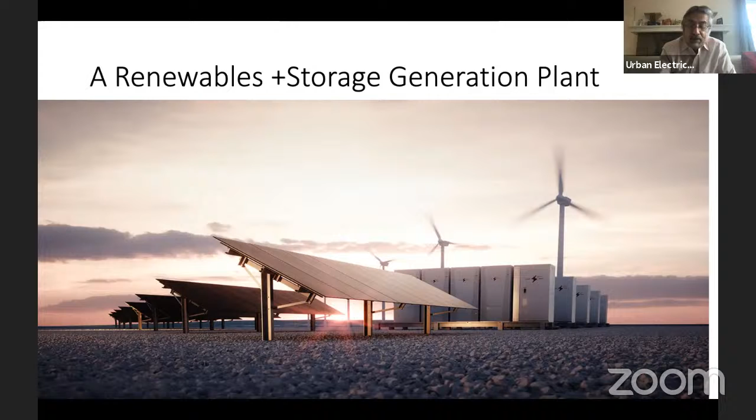So this is illustrated already. We are moving in this direction, and to some extent wind has become a significant part of the renewable mix, though solar will become more and more important as we go on.

You can see that this is, in the US, the total energy being used. The renewable part has become significant, about 11% already. Some of it is traditional—wood is still being burnt, biofuels have been more or less steady and are still being burnt. It's mandated that a certain amount of the transportation fuel is ethanol, which has to be added to gasoline, so there is some use of biofuels already.

Wind has become quite significant, but a lot of the wind resources are being used up, so the growth of this for the future will be perhaps less. Hydro, pumped hydro or hydro, is significant; however, this is also reaching saturation in some ways.

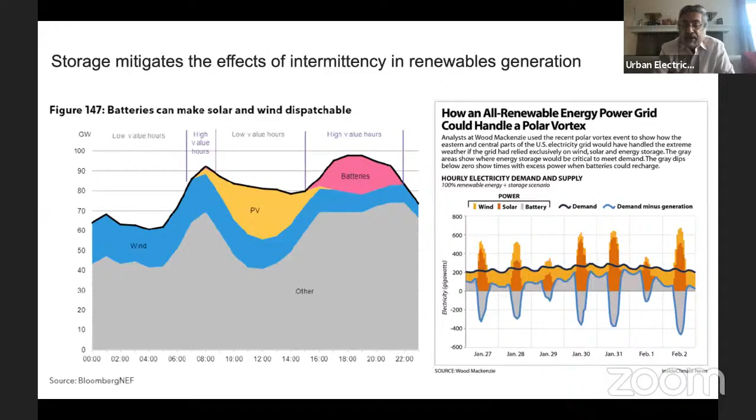This electricity can be used to drive cars eventually, for transportation, for rail lines, and so on. So we can transition even the transportation sector to run on renewable energy.

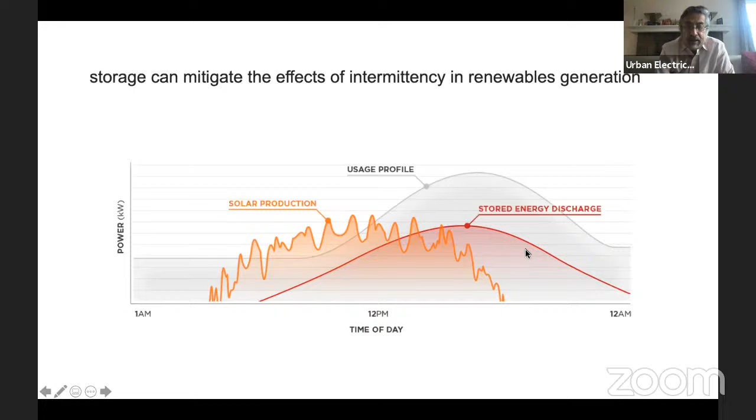So this is a very important role for stored energy from the excess sunlight. During this period, there's excess sunlight, which can be stored, and then it can come out during the period when there is no sunlight. What are the options to store energy?

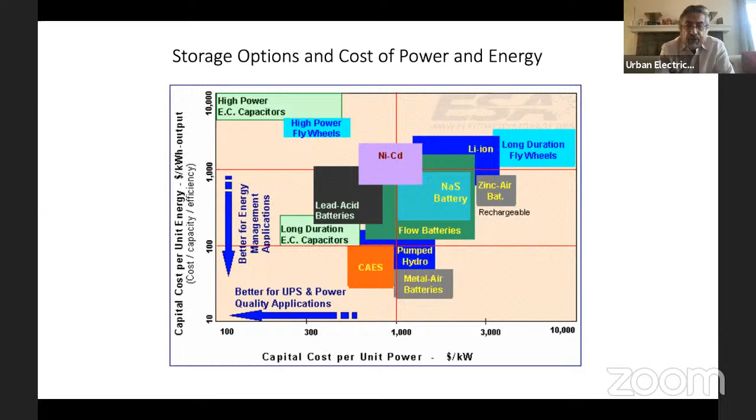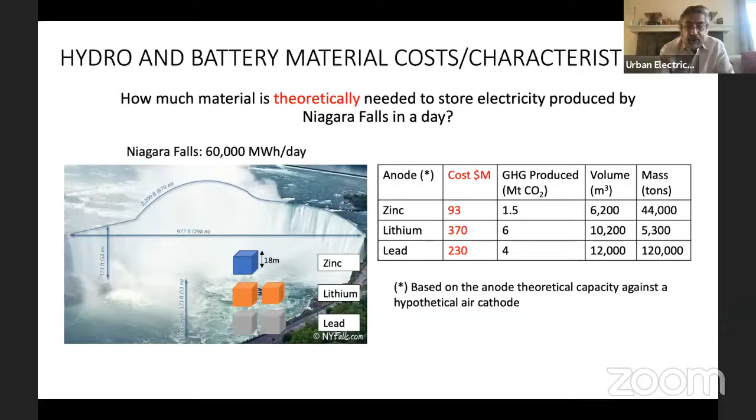How do these batteries work? Well, before doing that, I want to show you that in the long term, it's likely to be some form of electrochemical energy storage that we are going to use, because they are readily deployable and distributed. They're not location sensitive like hydro and compressed air storage. They can be put in cities, in homes, and so on.

So there are broadly two types of cells. One is what I call electrolysis cells. These are cells which form a material like hydrogen from, say, water. You can burn the hydrogen, or add it to natural gas to increase its calorific value while reducing its carbon dioxide footprint, or directly burn the hydrogen, and you can produce power without producing CO2.

The second category are power cells, and there are two types. One is so-called batteries, which store energy electrochemically and release it through a redox reaction. There's a cathode and an anode, and the reactions occur there. What you transfer between anode and cathode are ions, not electrons. The electrons go this way and make a current. So during charging, you reverse the redox reaction, storing energy in chemical form, and during discharge this energy comes out.

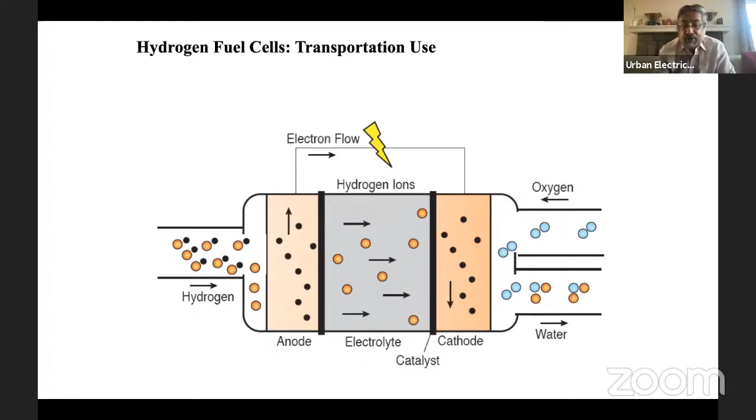Let me show you what a fuel cell does, because it's also a competitor for lithium-ion batteries in transportation. A fuel cell takes hydrogen and oxygen from the air and recombines them to produce electricity. This really is a way of combustion, think of it that way, except it directly produces electrons without going through a generator. What's produced is water, which is then exhausted.

But it's also limited by essentially being a Carnot engine, because it's a form of combustion process. So if you compare hydrogen used in fuel cells versus batteries for transportation, one of the major sources of carbon dioxide, the overall round trip efficiency of using hydrogen is relatively low. That's because you first have to electrolyze water to make hydrogen, then recombine it in a fuel cell, or run a turbine—it doesn't really matter. It has good energy density, but the overall round trip efficiency is fairly low, around 35%.

On the other hand, if you use a lithium-ion battery or some form of lithium battery, you can charge it up and discharge it. Taking into account losses in this process, the round trip efficiency may be about 85%.

It can capitalize on the existing electricity distribution infrastructure, whereas with hydrogen, you'd have to build a hydrogen distribution infrastructure if you wanted to charge cars. The disadvantage compared to hydrogen of using something like lithium is that the energy density is significantly lower. So the range of your car would be significantly higher with a fuel cell because hydrogen is very energy dense and easier to store. If you compress it and store it, you get more range.

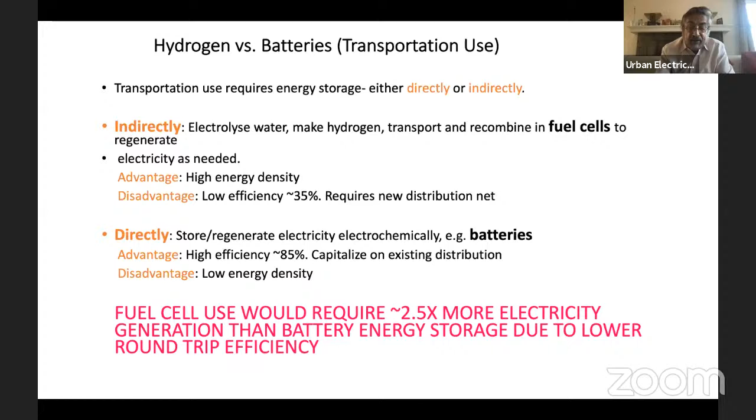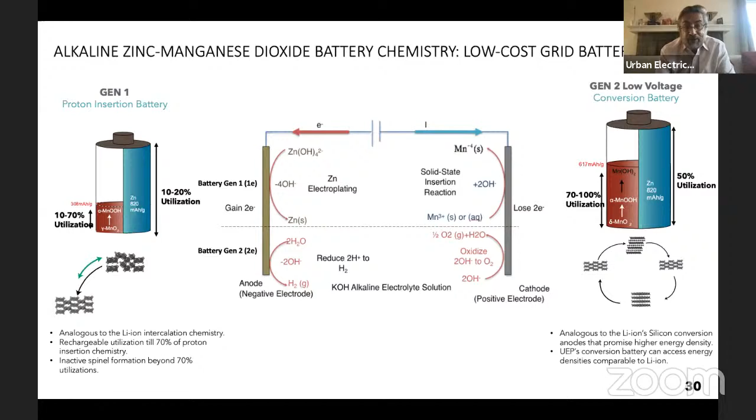For transportation, clearly weight is very important. So even though lithium and cobalt could be more expensive, there is a practical aspect to this. So let me move on.

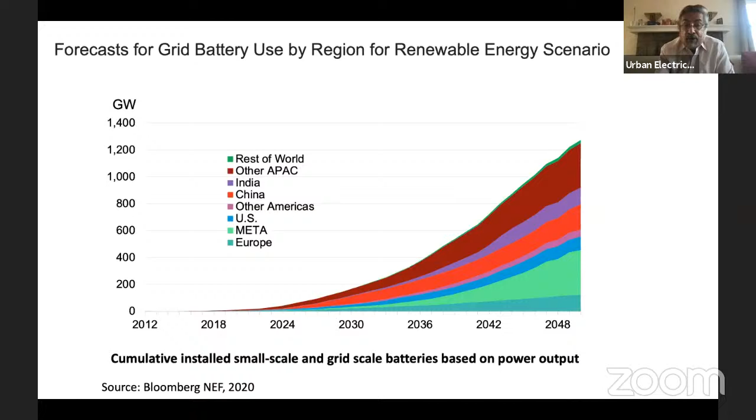And you can see that India is very significant here - you can see this line. This part is India, and this larger one is China. Actually, the US, because we can see larger deployments being needed in India and China, is of the same order or even a little bit less than India. So India, because it has such an important potential use of solar energy in particular, would really have a big need for this type of storage we're talking about going forward.

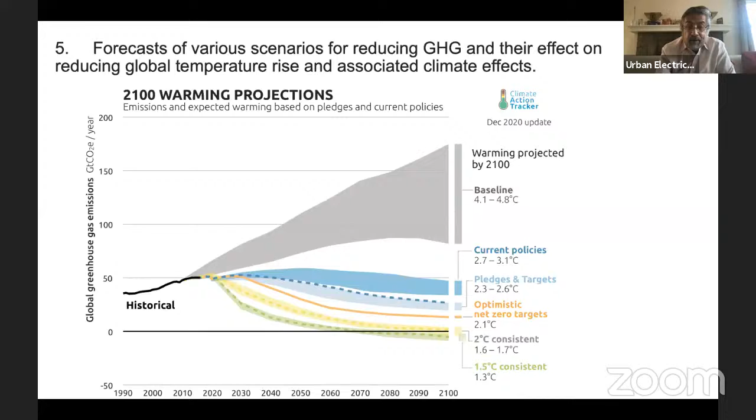I think net zero is more likely to be a possibly sustainable future. So the last thing I wanted to show you is the effect of this, not just on warming and climate, which of course has very significant effects, but some direct effects on health.

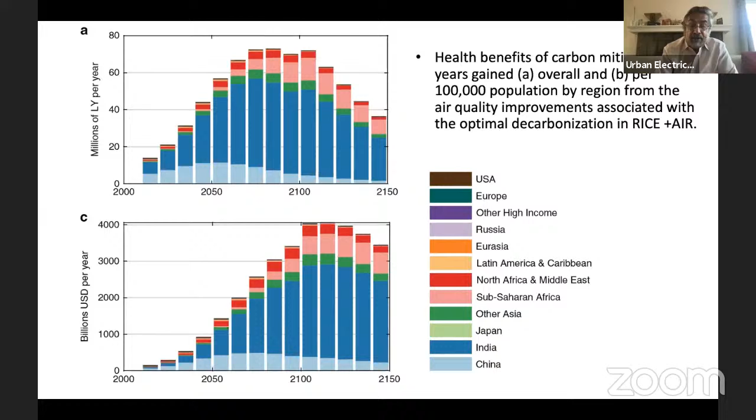Now this, of course, is taking into account that we changed and moved out of fossil fuels. So this is looking at a carbon mitigation scenario, but even then, the effect is very significant, and it's not realized how important this decarbonization is to health as well.

So I think that's my last slide. And with that, I will stop, and I'm happy to take questions from you then.

So I hope I haven't put everybody to sleep. It's late at night there. So...

Swamiji, I'm ready if you wish to take some questions. Can everybody hear me? Yes, Sanjoy, yes, this is really excellent, wonderful. Such a vast and also difficult topic, you made it so lucidly. Felt very interesting. Anyone from the participants? Any question? One question I have seen.

You can also see it in the chat box. Why do we use lithium ion? You got this in the chat box? I am looking for the chat box, I'm not very expert at this, okay, let me read it out. Why do we use lithium-ion batteries in vehicles? Can we have other types of batteries? Lithium ions are much more costly. Is there any other type of battery used in vehicles? I think in the presentation itself, you have discussed a lot of other types of batteries, isn't it?

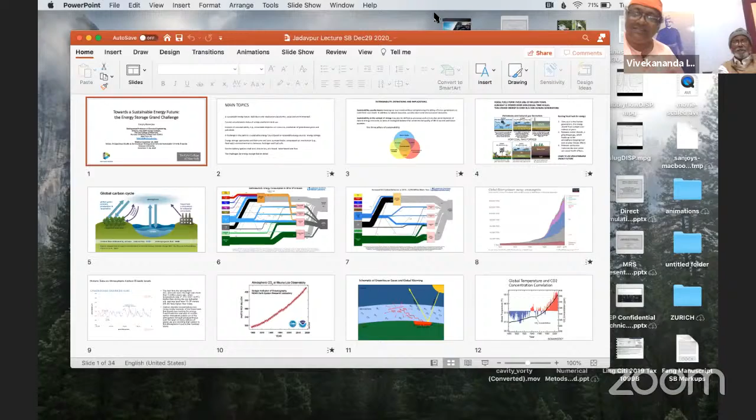Bye, good night. Good night for you and good night for us—good morning for you. Okay, bye, thank you. So participants, let us close it here, is it not? Okay, I'm leaving. Yes, okay, I am also. Thank you.